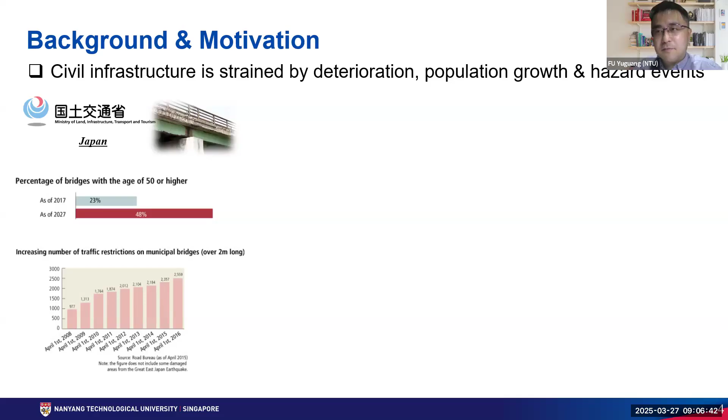Finally, I'll give concluding remarks. Starting with the background, our civil infrastructure is actually strained or overburdened for a couple of factors. The first one is aging. Even in Singapore, aging infrastructure is a growing concern, with a lot of infrastructure more than 40 or even 50 years old. On the other hand, there's the growing population.

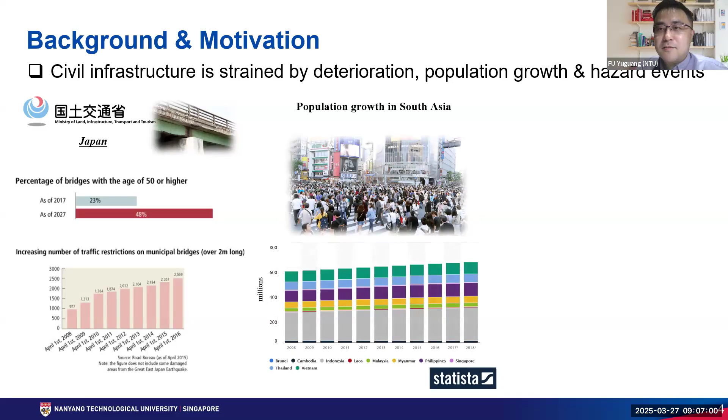Many people use that, and the old structure design was maybe for a relatively small number of people to use, but these days more and more people are getting crowded inside the building, so that's another factor. Lastly there's the natural hazard like earthquakes, and also human-induced hazards like impacts. So this can actually put our civil infrastructure in a situation that needs protection.

Good news is that I heard there's a newly released ASCE report on infrastructure, and I think the ratings have increased. I think that's good news.

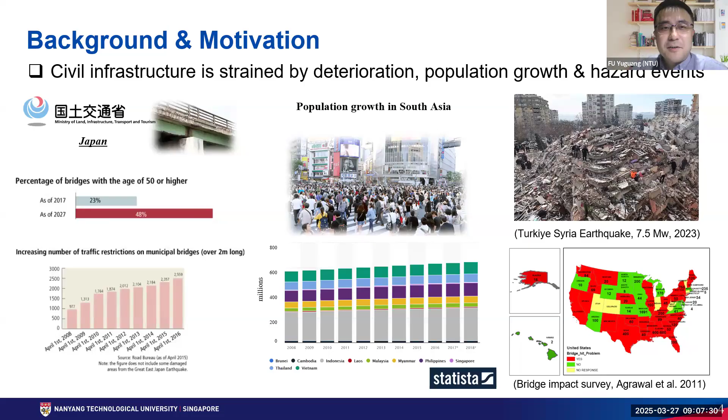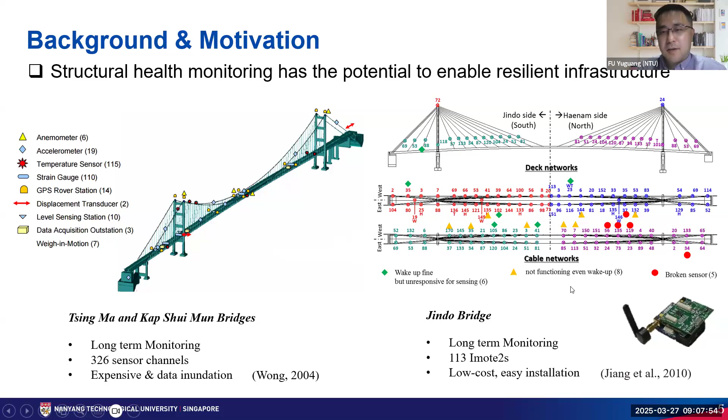So in my area, we mostly use structural health monitoring to help protect and ensure infrastructure resilience. This is just two representative examples: one is using wire sensors in the Tsing Ma Bridge in Hong Kong, and on the right-hand side is the Jindo Bridge in South Korea.

But using wireless smart sensors. In my previous work, I was working with Professor Spencer at University of Illinois. My main work was helping to develop the X-Node, the next generation wireless smart sensors.

So the key focus was to make sure it can do multitasking, it can also do event trigger sensing, and lastly, it can do cloud-based data management as well.

We also got some Small Business Innovation Research Phase 1 grants to commercialize the product for, I think, railway bridge recognition assessments.

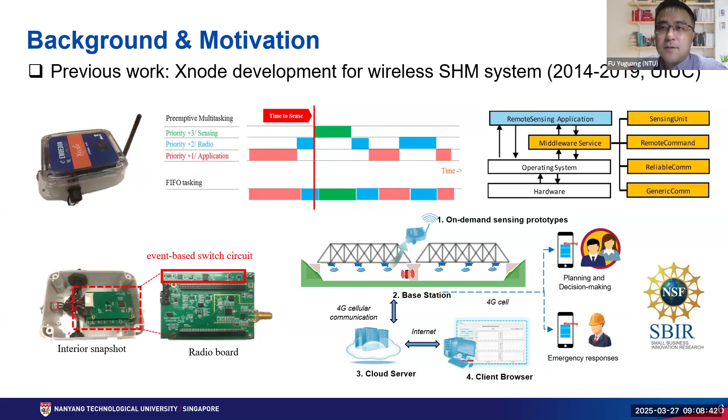So moving forward, after I moved to Singapore, I'm thinking about how do we extend these efforts to be more powerful, more cost effective, for sure.

And these days people talk about IoT and AI a lot. So we are thinking about what opportunities would be offered by introducing this into our existing wireless structural health monitoring system. One intuitive idea is that since we are talking about IoT, we will have more remote monitoring functionalities.

And there are a lot of communication protocols we can leverage. On the other hand, since current chip and electronic engineering advancements, we can put more and more computing into the edge devices, and that can make our decentralized computing more powerful than before, compared to previous systems like IMOTE2 or X-Node.

So the benefit is that we have less data for transmission, faster SHM results, and in the end we can make the system more compact and more scalable, such that we can span our SHM applications into not just signature structures but also traditional or normal structures.

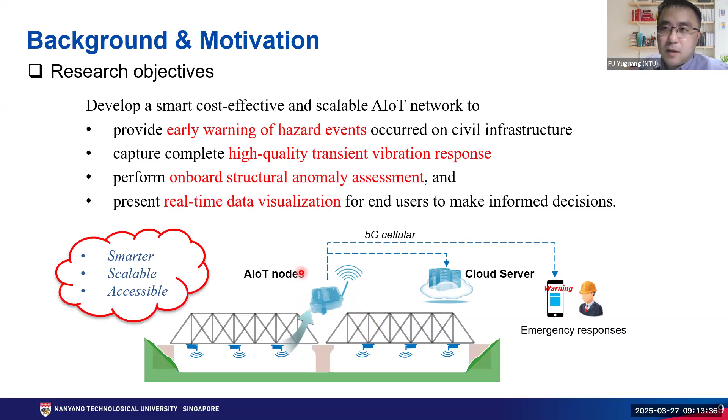Compared with the traditional wireless smart sensor, we actually use 5G for communication, and we will totally remove the gateway because each node can function as a gateway, and they can also talk with each other more efficiently. So in summary, it will be smarter because we can put AI onto the device. It could be scalable because each one is compact and cheap, and it could also be accessible remotely by the end users.

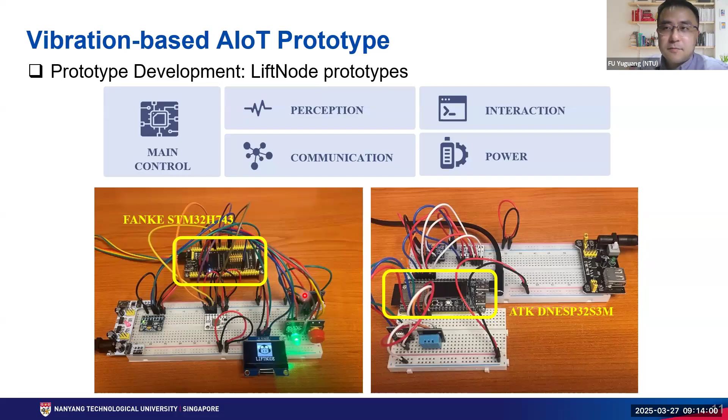So here's the talk, and we'll talk about some ongoing efforts. We're still developing some prototypes. We haven't made it a more commercial product yet. So this is two kinds of ongoing efforts. We use STM32 and also ESP32 as the microcontroller, and based on that, we do some plug and play with some devices.

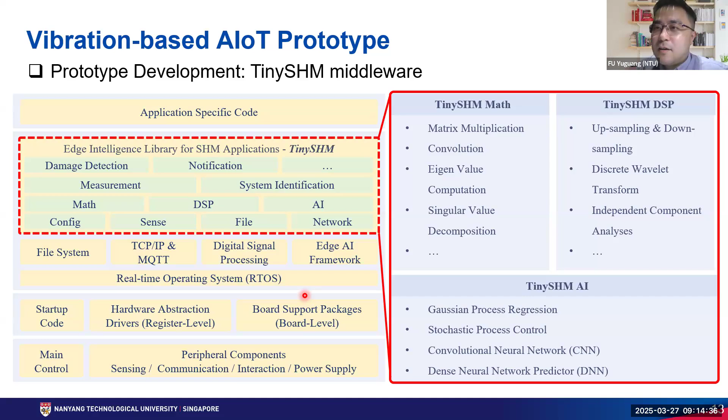So here's the list of hardware components we use, and most importantly, we are developing the middleware service. We want to develop a TinySHM middleware such that it can be used by other community researchers. We will make it open source in the future. So in the end, people can just use our middleware, and then they can develop their own application service on top of that easily.

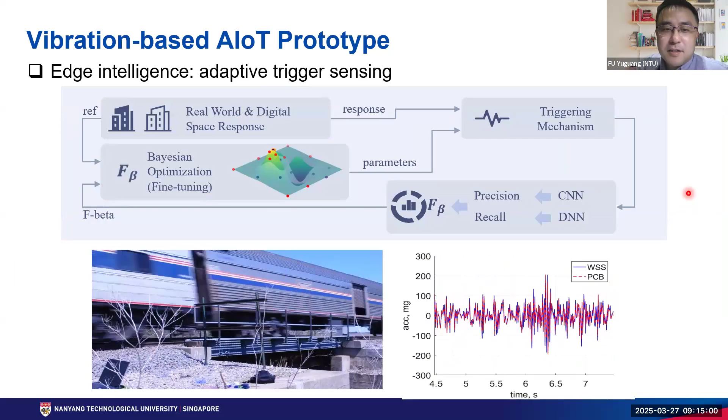So here I talk about two key features powered by edge intelligence. One is the adaptive trigger sensing. For example, if we want to capture train crossing events, especially in North America, some trains may not be quite on time. So we cannot just turn on the sensor all the time. But how do we capture this transient event unexpectedly? We need to make the sensor adaptive and smart to turn on and off by themselves.

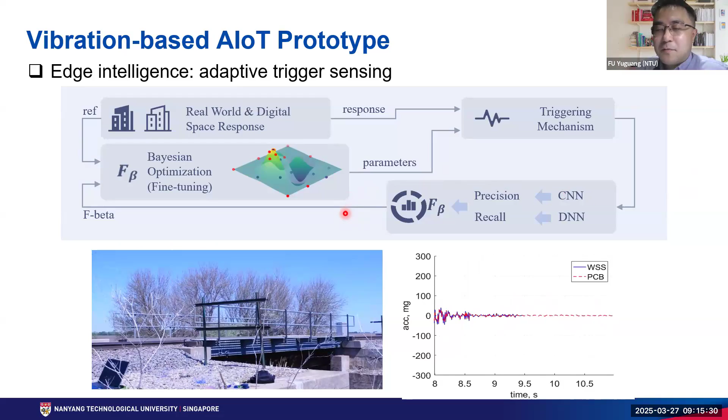The other one is sensor fault diagnosis. This has been a very hot topic in the past, but most people focus on data anomaly, not sensor fault. So we are moving forward for sensor fault. We're not just satisfied with the symptom, the sickness, but we also try to diagnose what is the source of these symptoms.

So we actually do some onboard processing. We try to understand what is happening behind this spike or behind these drifts, and then based on that, we can provide this recovery strategy on top of that.

So in that case, we can accurately identify what type of data anomaly it is, and then based on that, we can use strategies to diagnose the fault.

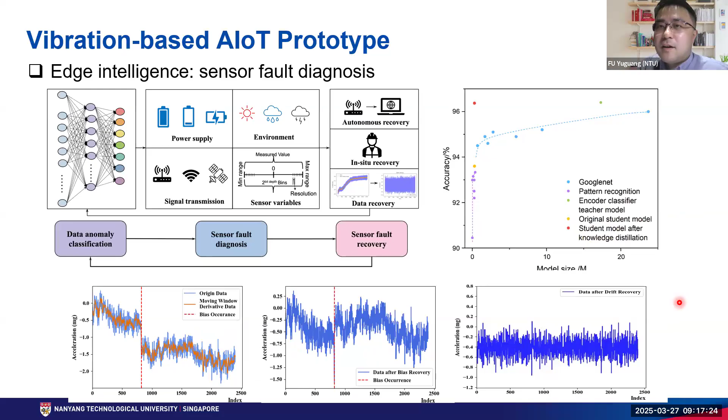So this is basically the tool. After we make sure it works, then we can move forward. We can deploy this onto large scale infrastructure, and the benefit is that we can let them process the raw data and send us early warnings if something anomalous happens. Then we can do further inspection afterwards based on this early warning.

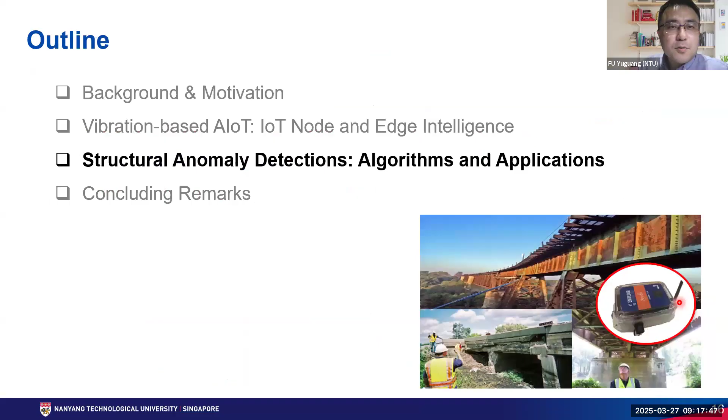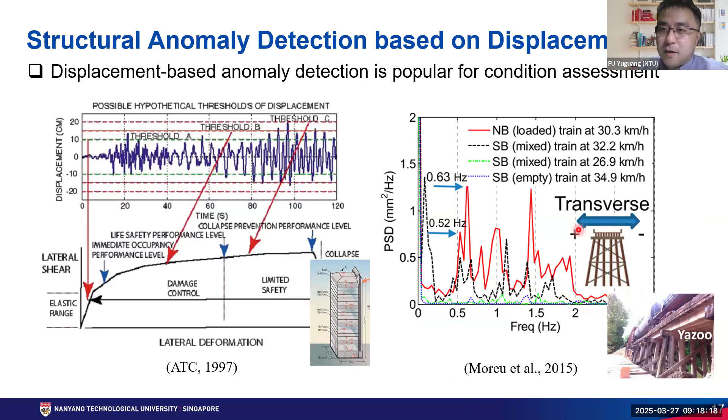Later on, I will talk about structure anomaly detection. I will talk about 3 examples quickly. The first one is based on the displacement. Engineers really like displacement; it's a very intuitive indicator to infer whether the structure is in good condition or not. Below are 2 examples. One is using the interstory drift to estimate the seismic damage. On the right-hand side is the lateral displacement for a railway bridge, which can also be used as a condition assessment indicator.

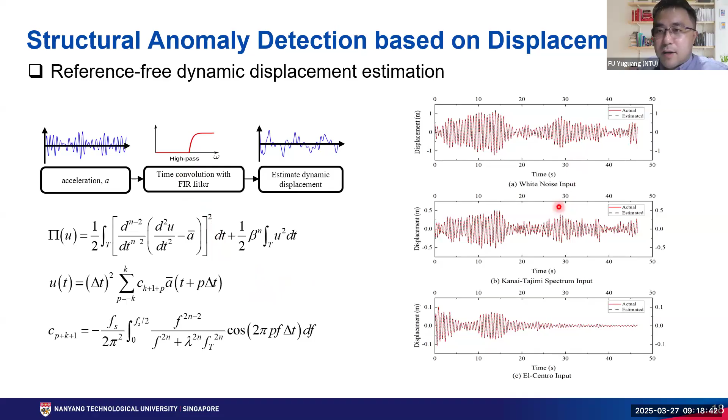Based on that, we developed reference-free dynamic displacement estimation, which does the double integration of the acceleration, but in a more advanced way so that we can minimize the error due to the integration. We also have high-pass filtering and an optimization algorithm inside it. The right-hand side shows the comparison between actual and estimation. But the bottleneck is that it can only estimate the relative displacement.

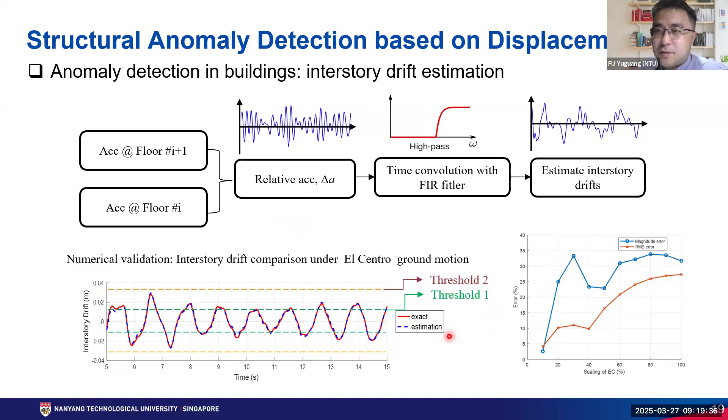On the right-hand side, we also try to estimate the accumulating issue, or residual error, from the integration. We're scaling up the earthquake. On the y-axis is the error, and it's growing, but it could still be an indicator for rapid condition assessment or anomaly detection. For that purpose, I think it should be sufficient. So we can use this strategy to estimate the interstory drift from the acceleration measurements of the IoT nodes, and then use a threshold-based rule to classify whether the structure is in good condition, for example threshold number 1, or bad condition, threshold number 2.

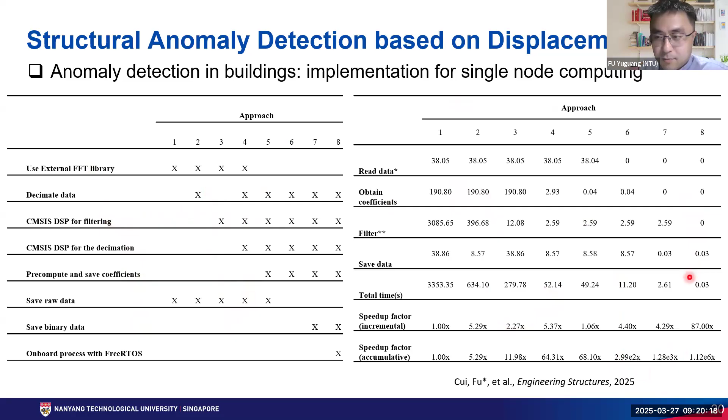The next step is we want to make the best use of the AIoT functionality. We want to push the computing into the devices. So we tried different strategies. Basically, we explored different computing steps, like using the FFT library, decimating data, etc., using the CMSIS DSP library. We also tried to optimize the procedure. The right-hand side shows the accuracy and the speedup. Eventually we can save a lot of time and also make it real time.

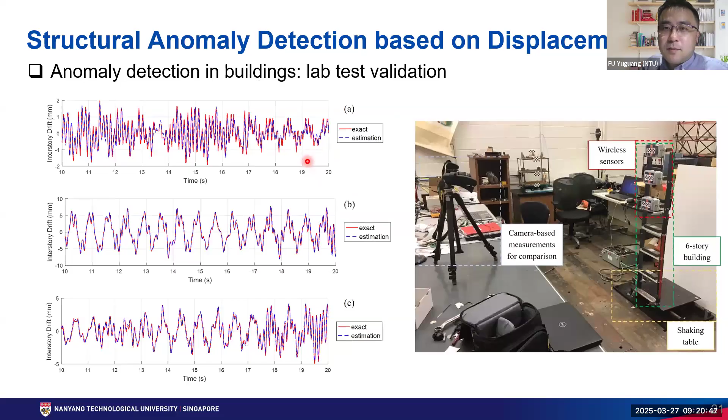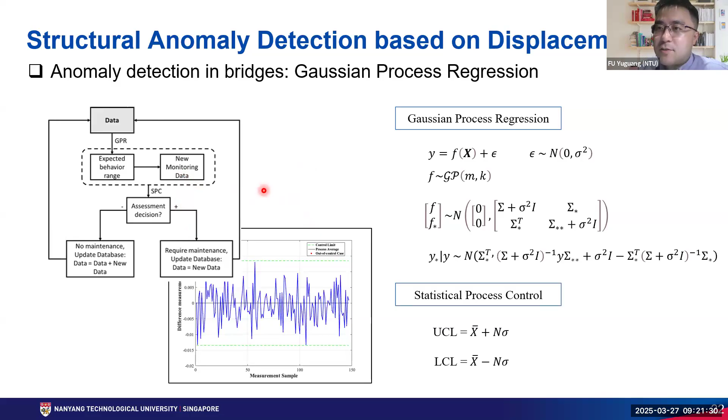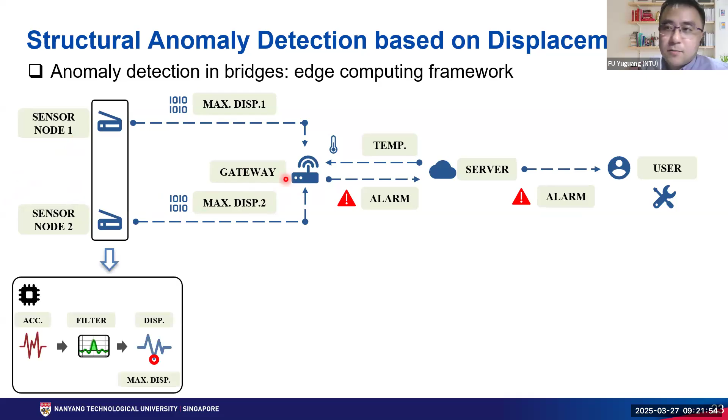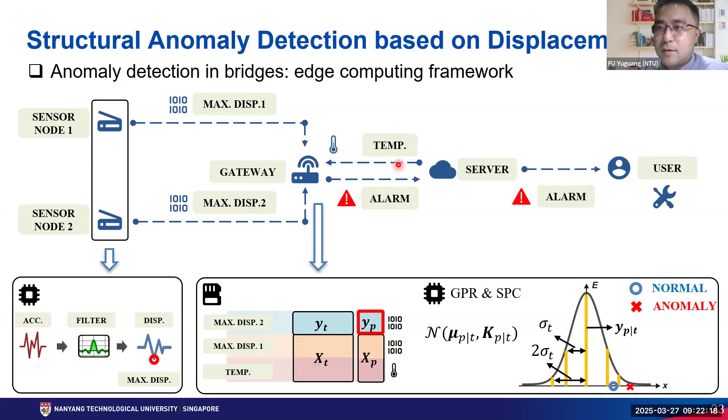Next, we also think about how to deploy that in the IoT node for edge computing. Assume we have 2 nodes and a gateway node for communication and data processing. Each sensor node does the displacement estimation and sends a single maximum value to the gateway node, and the gateway node runs the Gaussian process regression model on board. It then does the anomaly detection for condition assessment. We also consider temperature effects, trying to exclude the environmental effects as well.

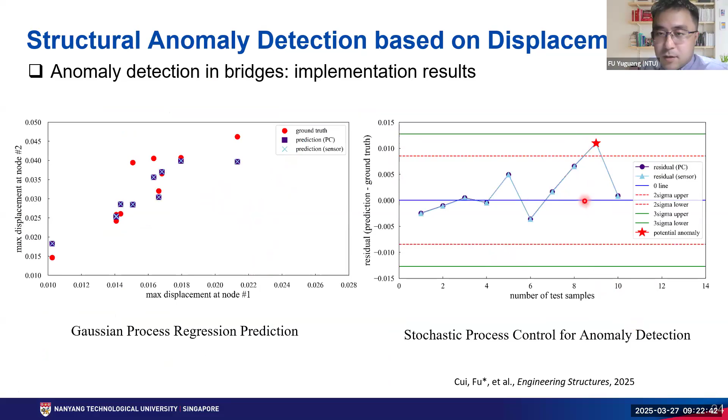Here's the comparison between PC computing and edge device computing in terms of the error. On the left-hand side is the Gaussian process regression prediction. On the right-hand side, the statistical process control. Pretty much every point matches very well, so there's no accumulating error.

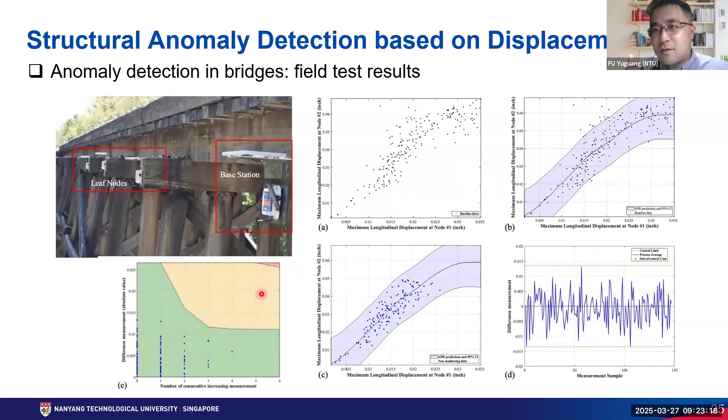And we use that strategy for the bridges, using the data from several railway bridges in North America, and then we do the modeling parts. And this is just the illustration of how we use the data from the real deployments. On the left-hand side, we classify the conditions into green, yellow, and red, indicating the different levels of the conditions for the bridge.

So the next one is based on the signal discontinuity. The basic idea is that if the acceleration measurement is very high frequency and perfect, with no noise, and damage happens, the discontinuity of the signal at the sensor close to that damage will be captured. But this is the very ideal case. In reality, we don't have such high frequency measurements, and we also have measurement noise on top of that. So this phenomenon will be totally blurred. There's no way to identify that.

So people use blind source separation. They first use the wavelet transform. In that case, they can decompose the signal into this type of discontinuity. Still you can see that, but if the noise increases, then they need to use blind source separation. They consider the damage source as an indicator. This is a damage source, and this is a normal source, and in the real measurement they're mixed together. So using blind source separation, ICA, independent component analysis, they try to isolate the component into this type of spike-like signal indicating the damage location and also the timestamp.

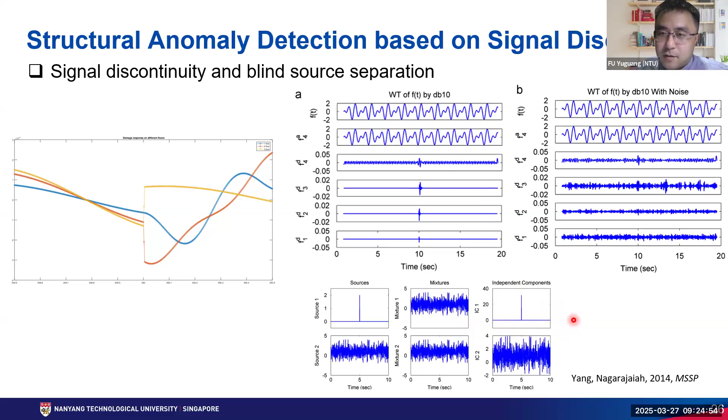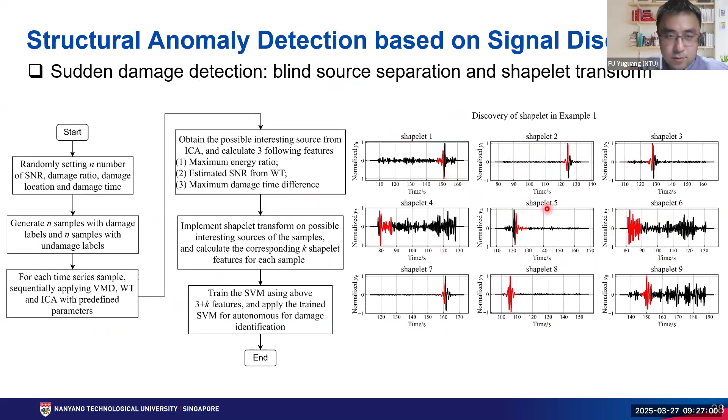After that, we also thought about whether we can make it fully autonomous. Because in the original strategy, we still needed human eyes to identify the interesting source as the damage indicator. And sometimes we have multiple spikes happening in different components, so it's not easy to realize autonomous monitoring. So we also introduce the shapelet transform, to find the most suitable shape that can represent the damage indicator. And based on that, we introduce a very simple support vector machine to do the classification of the damage.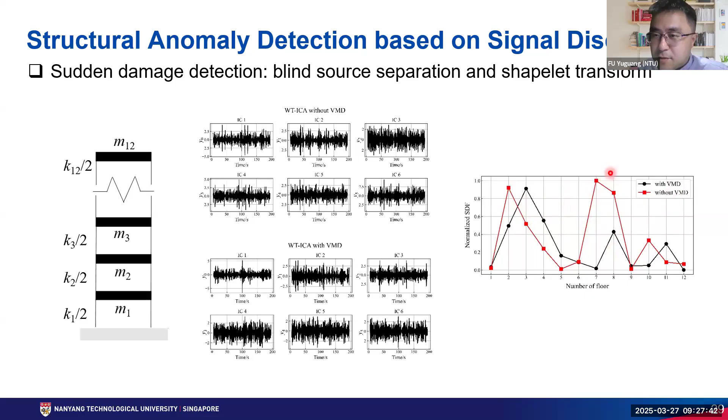So here's the result of the numerical simulation, where we test the wavelet transform without VMD and with VMD. With VMD, we can clearly see this damage indicator, but without VMD, we don't see that if the noise increases. On the right-hand side is the location of damage. Without VMD, we would see the number 7 floor or number 2 floor has damage, but with VMD, we can exclude these false, mistaken cases and focus on the correct one, which is the 3rd floor has damage.

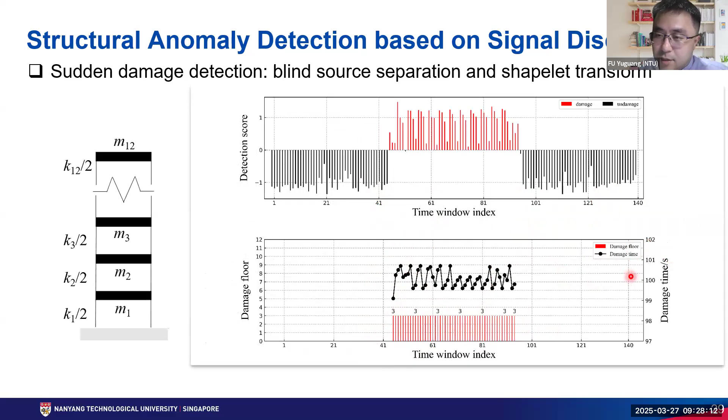And this is the online processing. We do the classification of damage using the shapelet transform and the support vector machine. And here it shows it correctly identifies the location of damage and also the timestamp of damage. The location is the number 3 floor, and the timestamp is around 99 seconds to 101 seconds.

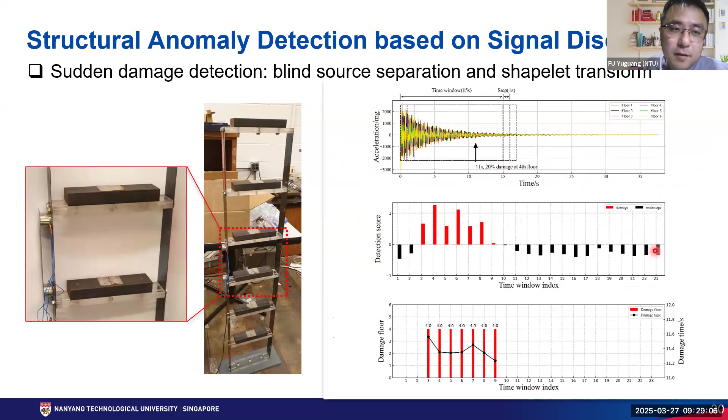And here's the kind of online processing of this strategy. We also make the onboard processing quite successful. Last example, just to quickly go through. The last example is based on deep learning; we also try to do some deep learning strategies.

So this is the AI Singapore project. I collaborate with Professor Yang Yaowen. I'm the co-PI in this project. So this project has the objective to detect anomalies in the tracks of the tunnel. The traditional way, manual inspection, is not quite efficient. So we are thinking, can we use distributed sensing?

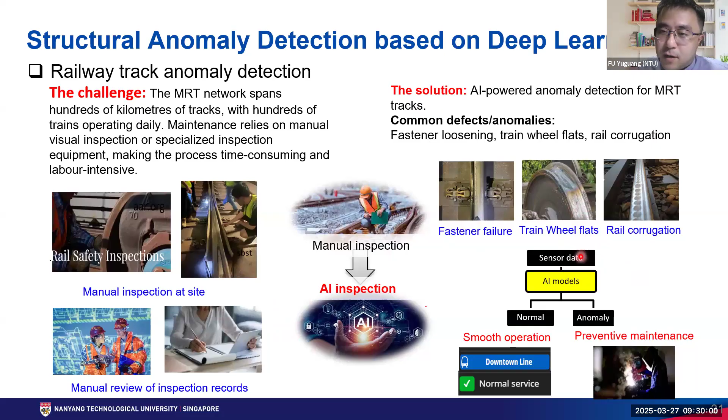For wheel flat, we actually developed unsupervised machine learning using the autoencoder. We also implement trigger sensing. Basically, we use the audio to detect if the train moves across, and then we wake up and turn on the sensor to do the data collection. And when the train has moved by, we stop the sensing automatically.

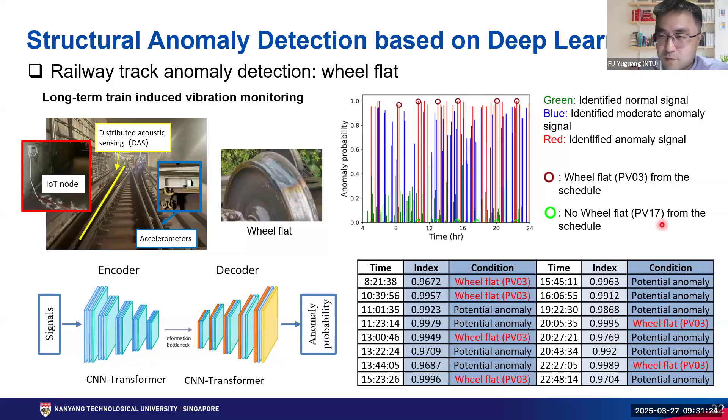So for wheel flats, we collaborate with the Metro company to develop a deep learning model that detects the wheel flat using primarily the accelerometer signal alone. Specifically, they tell us from the schedule when there's a wheel flat and when there isn't. So we use that information to train our unsupervised machine learning model. On the bottom is our detection results. The red one is a damaged wheel flat we detected, and it has been confirmed. There are also potential anomalies listed there for the company to do further inspection.

We also do fastener failure detection. Basically we manually loosen the bolts on the track, let the train move across, and see what the vibration signal looks like. The traditional way uses the accelerometer, but it can only be deployed at some locations and may not cover very large-scale fasteners. On the other hand, the DAS system is not exactly an acceleration measurement, so it's very difficult to interpret results. So what we're doing here is cross-modal transfer learning.

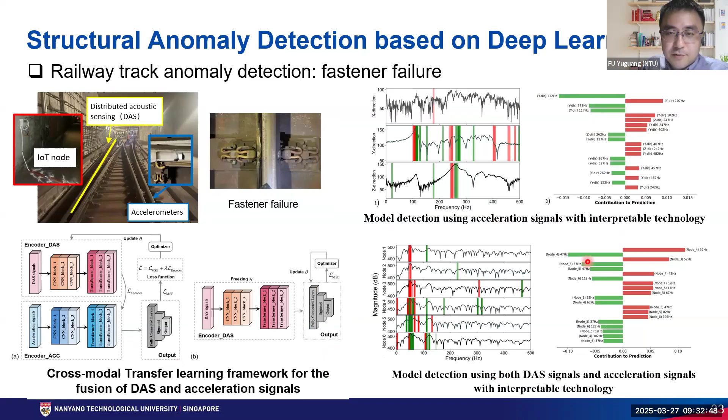We extract the useful information from the accelerometer and let the DAS data model learn that feature based on what was learned from the accelerometer. Based on this cross-modal feature learning, we can successfully do fastener failure detection. On the right-hand side, showing more detail about which features make a big difference for the failure detection, which gives us an interpretable idea behind this black box. The accuracy is actually very high, though we're not showing it here.

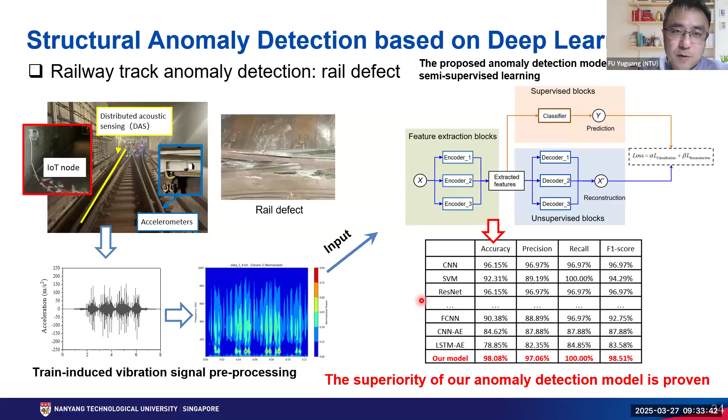So for concluding, a new vibration-based IoT product prototype is being developed. We are still developing this next generation. It's built upon the hardware and also TinyML middleware. So it's cost-effective and computationally efficient for edge intelligence, and very suitable for large-scale, cost-effective structural anomaly detection.

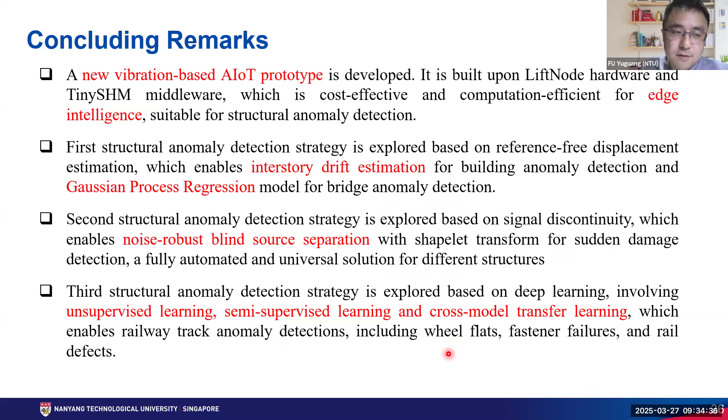We talked about three different strategies. One is based on displacement estimation to do interstory drift and bridge anomaly detection. The second one uses signal discontinuity to do noise-robust blind source separation to find sudden damage. And lastly, we explore deep learning involving unsupervised, semi-supervised, and cross-modal transfer learning for railway track anomaly detection.

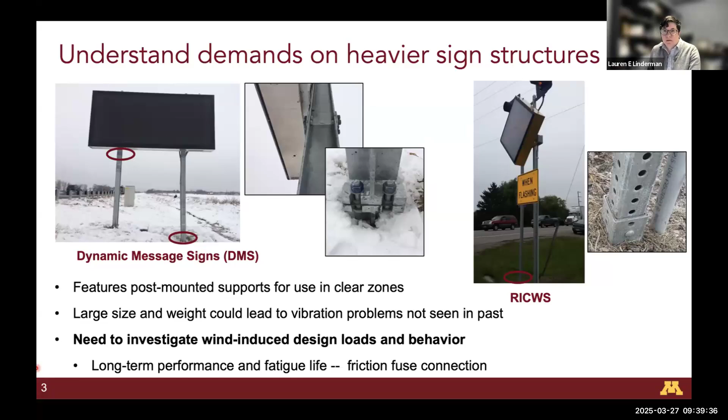In both of these case studies, we instrumented these structures in the field to identify the wind loading, determine experimentally validated models to ultimately capture some response measure of interest. So in this case, we were looking at the fatigue life for the DMS and the oscillation amplitude for this RICWS sign.

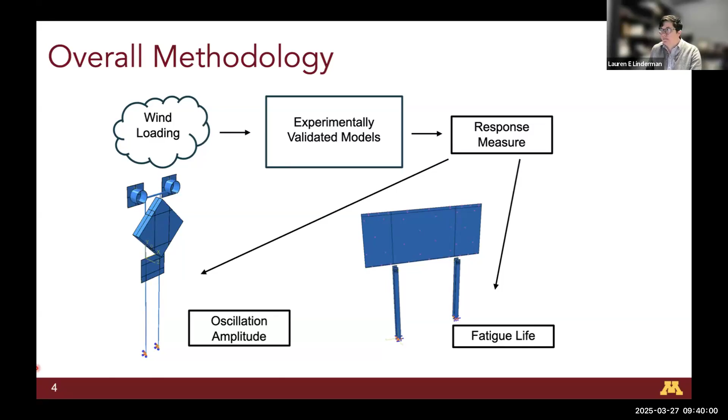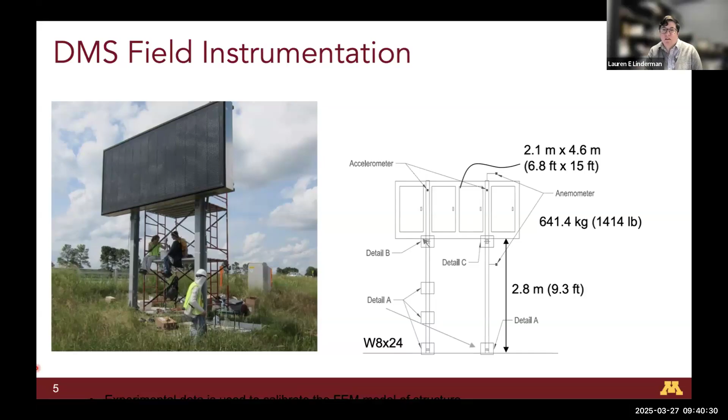So initially, I'll start by talking about the DMS. This structure is about 3 meters tall to the base of the sign. The sign itself weighs about 1,400 pounds, or about 700 kilograms. And it's a large sign structure supported on two steel posts that provide the supports.

We used a variety of instrumentation.

I just got a warning that my internet is unstable, so if you can't hear me, please let me know.

We used cup and vane wind anemometers at the top as well as the mid-height of the sign to gather ambient environmental conditions, 2 accelerometers mounted to the back of the sign to get vibrations in the normal direction, as well as a series of strain gauges. So we had about 70 strain gauges installed at different cross sections along the height of the posts.

The two that were the most interesting were the strain gauges along the W section. We had strain gauges to capture axial strain in the flanges, as well as a rosette to capture shear strain. And then in the friction fuse connection, we had strain gauges at critical locations, as well as the edges to capture the flow into the plates.

In our data collection, we had 2 approaches. The first was to capture slowly varying data. This was data taken at 5 Hertz from which we computed 5-minute averages. We used this to capture long-term trends, do some debugging, as well as for triggering the FAST system. We took wind data at 1 Hertz, which is the maximum sampling frequency of these cup and vane anemometers. And then we measured the strain and acceleration at 200 Hertz. Part of this was that we didn't have onboard anti-aliasing filtering, and this allowed us to downsample later.

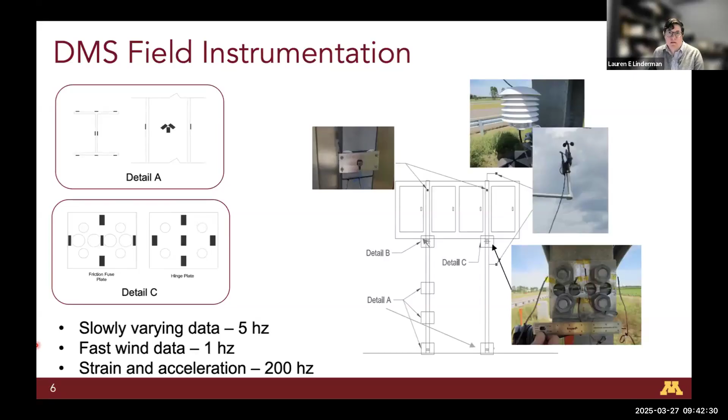And so the big question here was whether, to analyze the system, we needed to use static or dynamic analysis. Traditionally for design of these types of signs, you do not consider wind-induced dynamic behavior. You do an equivalent static analysis due to a wind pressure. And so we wanted to see how closely this reflected the true behavior of these signs. To do this, we looked at the force that we would anticipate from the wind loading and how that should compare to the strain that we are observing in the different posts.

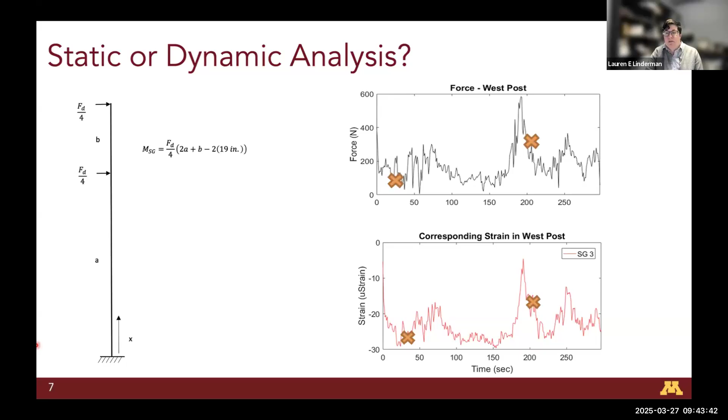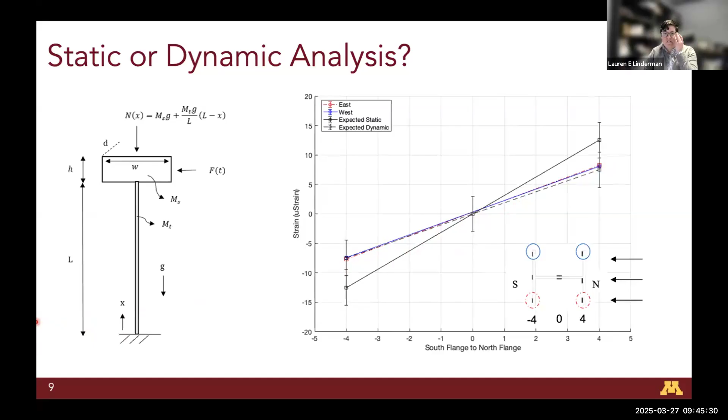So this to us said, okay, dynamic analysis is really important. The mass of the system does have an impact on the response, and you need to conduct dynamic analyses. If we want to identify the behavior, an equivalent static analysis isn't going to cut it. And so for our design analysis, we took our experimentally validated DMS model and applied wind loading to then look at our response measure.

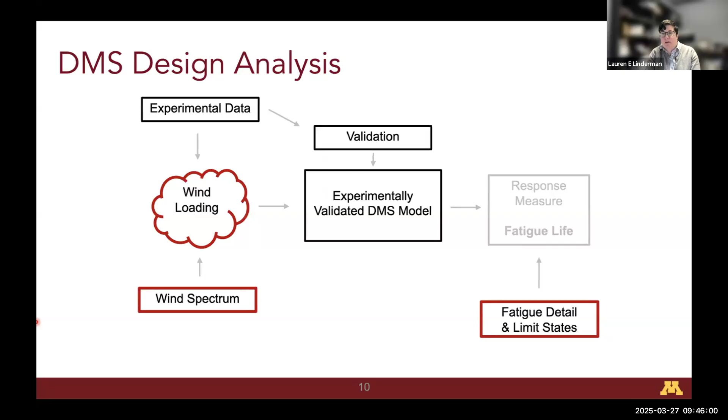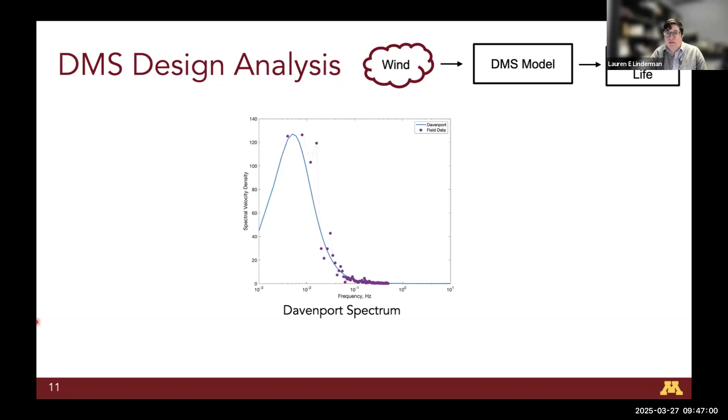We were confident we could use this to reflect our wind loading. We then scaled up this Davenport spectrum to the mean hourly wind speed with a 0.01% exceedance level. This is the current approach, or probability of exceedance, used in the AASHTO design code.

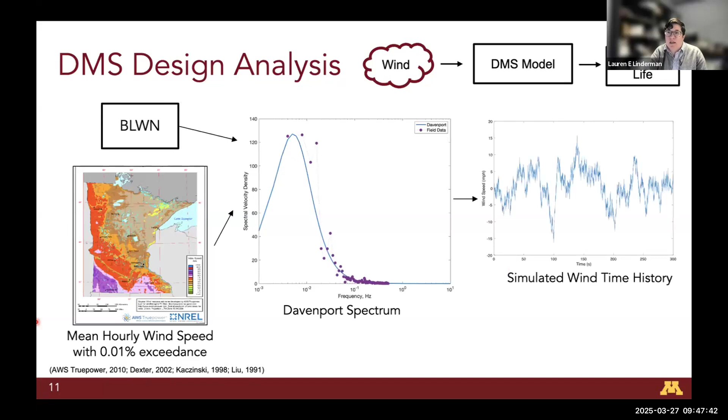So we then created a Davenport spectrum with this wind speed. We applied our band-limited white noise through the Davenport spectrum to generate simulated wind time histories, where we could get the variation in the wind with time. This is then applied to create the pressure function.

Typically you would only look at the variation in the wind and its impact on tension and the fatigue detail. But in this case, we thought the gravity load of the large mass of the sign panel might actually counteract some of those tension forces. So we accounted for not just the variation, the V of T, but also the mean wind speed, so we could do an analysis that incorporated the gravity demands.

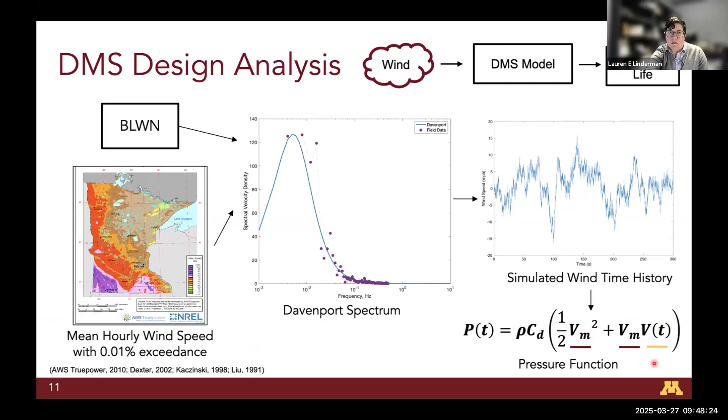If we look at a typical SN curve for this fatigue category, the constant amplitude fatigue threshold is 7 KSI. Below that stress limit in tension, you should have an infinite fatigue life for this category D type detail. We actually found from our model a peak stress demand of almost 10 KSI, significantly larger than the stress demand under an equivalent static analysis, which peaked at about 6 KSI.

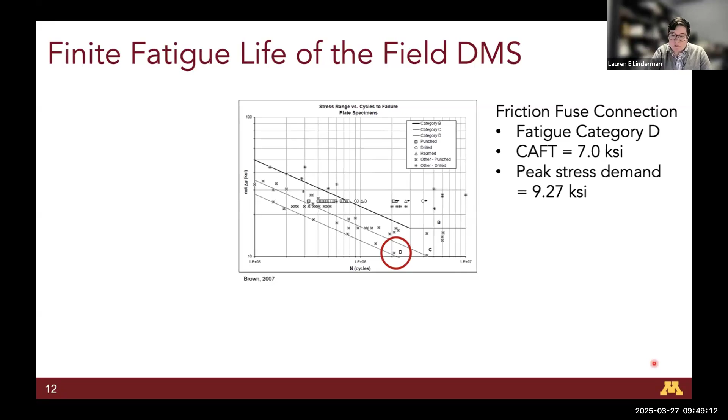So you can take this approach. For 10 KSI, we have about 2 times 10 to the 6 cycles for our fatigue life. We take our 10 KSI, then looked at the instances of 1 second speeds above the hourly limit wind speed, and translated that to a yearly incidence of hourly wind speed beyond the limit state wind speed. This is a pretty conservative assumption, going from 1 second speeds to hourly speeds beyond the limit state wind, and then counting those events.

We assumed those events lasted the same length as our FEM analysis, and assumed about 4 cycles per second of response. That gives us the number of cycles that would exceed this stress in a typical year. So it was very conservative steps along each path.

We found that in each year we could have about 84,000 cycles above this fatigue limit. This gives us a fatigue life of 24 years. Now, in the life of this sign, that is essentially an infinite fatigue life. You would likely replace this sign at that point or before.

But this does show that we no longer satisfy these traditional limits with a static analysis, and a dynamic analysis is needed. We could extend this to other signs. There's a variety of sign architectures, and we could look at the potential dynamic amplification you would get from incorporating this large mass in the response.

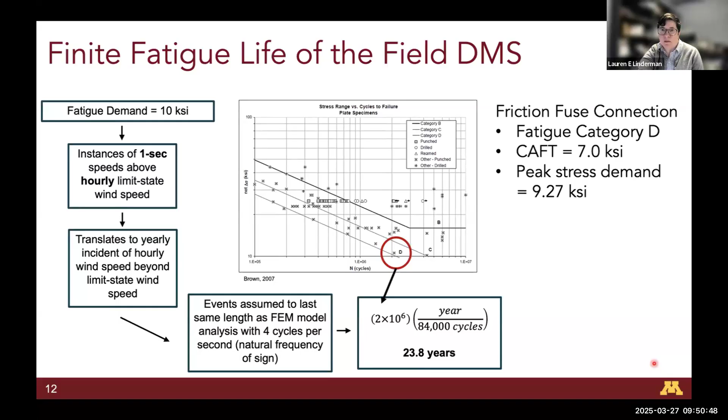We then looked at the RICWS, where we weren't necessarily concerned about fatigue, but were concerned about oscillation amplitude. These structures are about 4 meters tall total. They have a 1 meter by 1 meter sign panel that weighs about 75 pounds. I apologize for the mixture of units.

These structures use this kind of corrugated metal tube, so because of that we didn't implement strain gauges. Instead we used displacement measurements on the posts, as well as accelerometers on the back of the sign to capture normal vibration as well as torsion. We also had an anemometer, a cup and vane anemometer, and temperature sensor placed to the side, outside of the wake of the response.

Similar to the DMS, we had two approaches to our acquisition. We took our slowly varying data to generate 5-minute averages and trigger our fast system, which again captured our wind data at 1 Hertz and our displacement and acceleration data at about 100 Hertz.

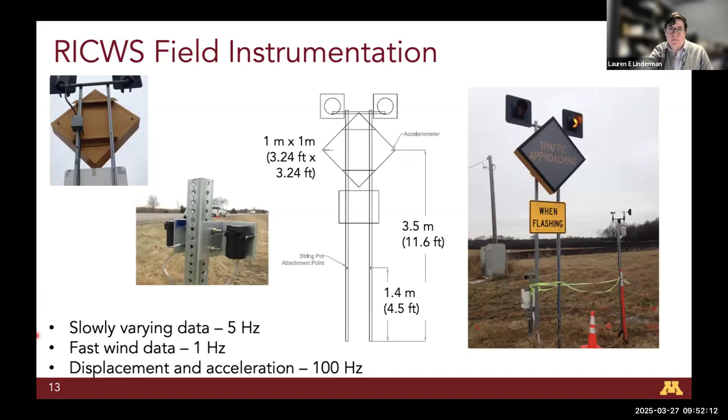In addition to our field experiments, we also did some small scale lab experiments. At the St. Anthony Falls lab here with my colleagues in water resources, we looked at a 1 to 18 stainless steel scale model of our sign structure.

We put this scale model through two types of tests. One was a tow tank, where we can capture the drag as well as look at the wake in the water. And then in the wind tunnel, we have our small scale model subjected to a turbulent flow, and a hot wire anemometer to measure the speed in the wake at different heights beyond the sign.

This allowed us to get information on the Strouhal number, which will impact the shedding frequency of the sign, as well as the drag coefficient for this type of structure. We also used these results to validate a computational fluid dynamic and FEM model that was used to confirm what we were seeing and propose potential modifications.

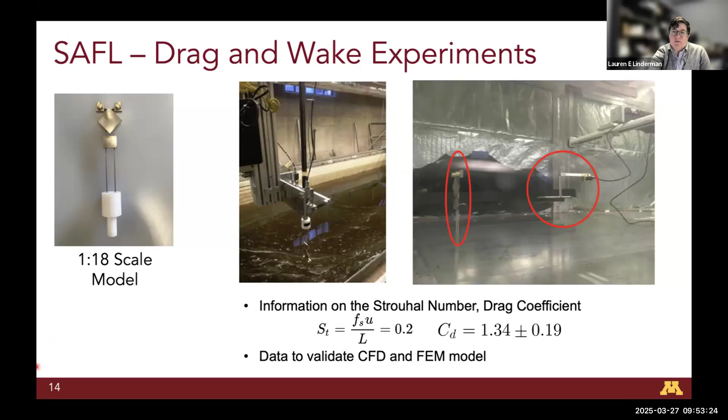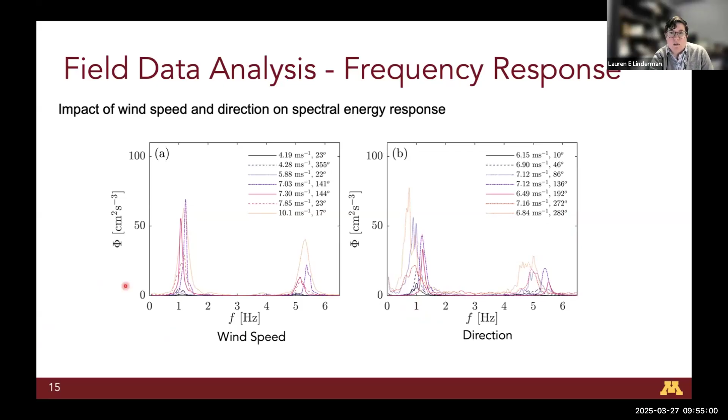So what this told us is that there is a dynamic interplay between the wind and the response of the structure. And particularly, we're interested in how the variation in wind speed might play a role here.

At around 7 meters per second, you get this overlap of the shedding frequency and the natural frequency of the sign. This wind speed is a pretty typical wind speed, and this is why we're seeing the amplification of the response at this particular wind speed in those previous plots. The natural frequency of the sign is quite low - for this type of structure, it's about 1 hertz. This is a function of both the connection as well as the weight of the sign. So by adding this additional mass, you're aligning this natural frequency and getting this vortex shedding response.

So if you wanted to do any modifications, this is what you would really need to address in order to limit the vibration, either adjusting the stiffness by removing that type of breakaway connection, or adjusting the mass for the height of the sign.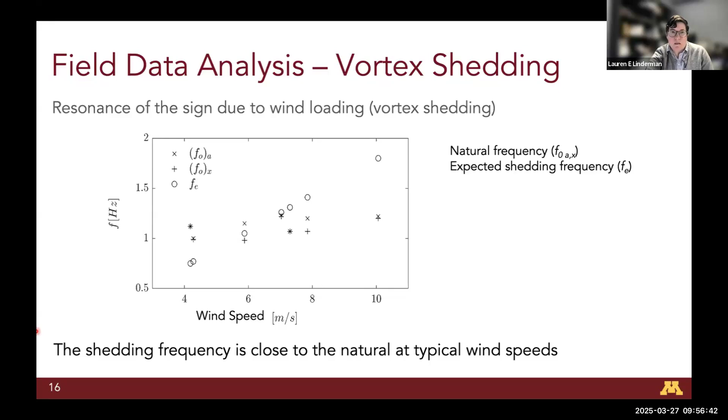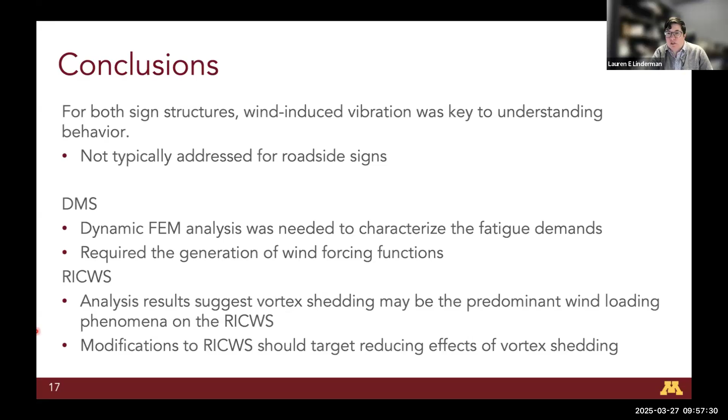So in conclusion, for both sign structures, wind-induced vibration was a key to understanding behavior. Again, in the US, this type of behavior is not addressed for these types of roadside signs. Only recently, in the most recent interim edition of the AASHTO code for sign structures, did they start to consider that DMS might need additional analysis, but they didn't say how to do that. For the DMS, we showed that we needed this dynamic analysis to characterize the fatigue demand, which required the generation of demand wind forcing functions. And for the RICWS, we found that vortex shedding was the predominant wind loading phenomenon, and so any modifications should target this effect.